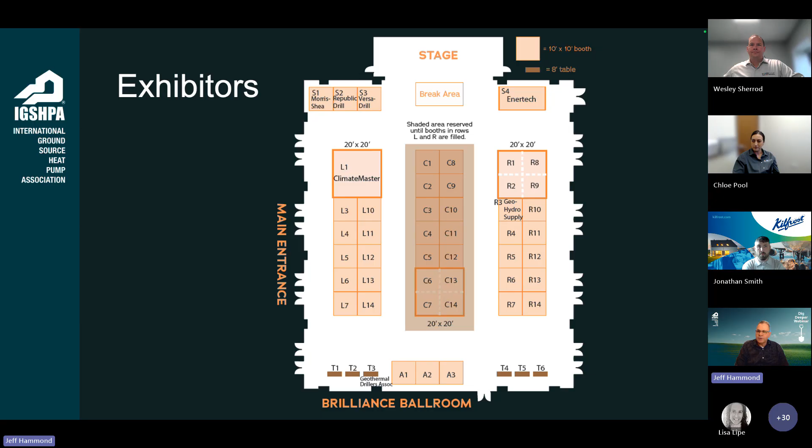If you're interested in research, IGSHPA is working with IEA in 2026 on the conference in late May in Vienna, Austria. And that's geared more towards research, university type presentations. So it's not really a conference like ours with exhibit space and so forth. It's dedicated to research.

If you haven't learned about our new training and certification programs just yet, you'll want to go to the IGSHPA website. There's a brand new page on training and a lot of connecting pages. And we also have a recording of our July 9th town hall where we go through all of the details in the new training program. It's pretty exciting. By the end of the year, we'll have over 20 new modules, and that's available to IGSHPA members at a pretty good discount.

Also, IGSHPA members have discounts on the new binational standard. This is the C448 Design and Installation Standard, CSA, ANSI, and IGSHPA. And it just came out in May. So if you don't have the standard, you're going to want to get a copy of this. It's got a lot of great information.

We still need your help on building databases so that we can tell people about all the various applications that are out there. We're always getting questions about schools, churches, hospitals, residential, you name it. And so the more information in those databases, the better it is for growing our industry.

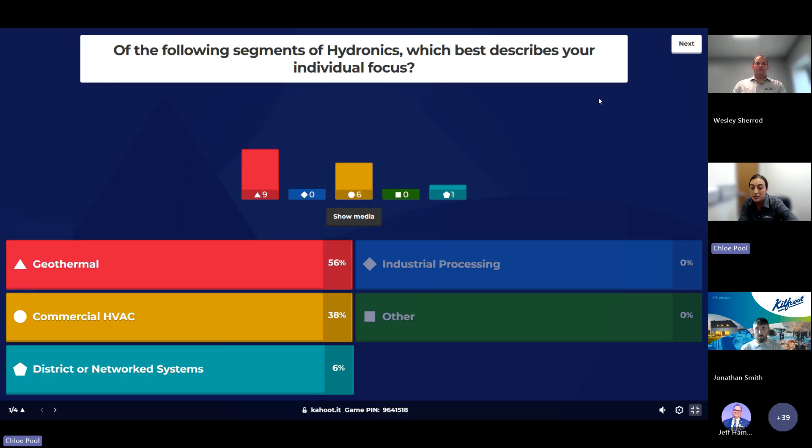Let's see what we've got. 5 more people. Here we go. All right, mostly geothermal. That is not surprising. And then we have some commercial HVAC. And then we have one from district network systems. Awesome. That's really cool to see.

Okay, here comes another poll. Which heat transfer fluid do you have the most experience with? We've got propylene glycol, ethylene glycol, ethanol, methanol, water. Some of you might not even utilize fluids in your role, so we wanted you to feel very seen. All right, everybody's chiming in. Looks like we've got about half the group. Propylene glycol, ethylene glycol, ethanol, methanol, or water are your options, or you don't use a fluid. All right, wow, a lot of propylene glycol and 2 water. We've got 1 who uses methanol, and then a little bit of ethylene glycol. Okay, good deal.

All right, next question. How long have you been in the HVACR or geothermal industry? This one's always fun to just see how much experience is in the room. A lot of times I have found it is 10 to 15 years or 20 years. That can be one of the most common answers we get, which is always exciting to see how much people really do want to stay in this industry. There we go. 6 who've been 20 years, 3 who've been here 10 to 15. We've got some 5 to 10 years and 0 to 5. Awesome. I'd love to hear from the 20-year people at some point. That's a lot of experience to bring to the room.

Okay, so here's the hard one. Speaking of climate control, how many times a day do you think the average American opens their refrigerator? This is an actual multiple choice question like the ones you'll be getting later. So people are starting to get cutthroat. I can just tell. All right, 19, 33, 28, or 25. What do you think? Okay, 6 of you got it right. The majority got it. 33. That is definitely not what I would have guessed, but I've done this 1,000 times, so now I know the answer. Okay, awesome.

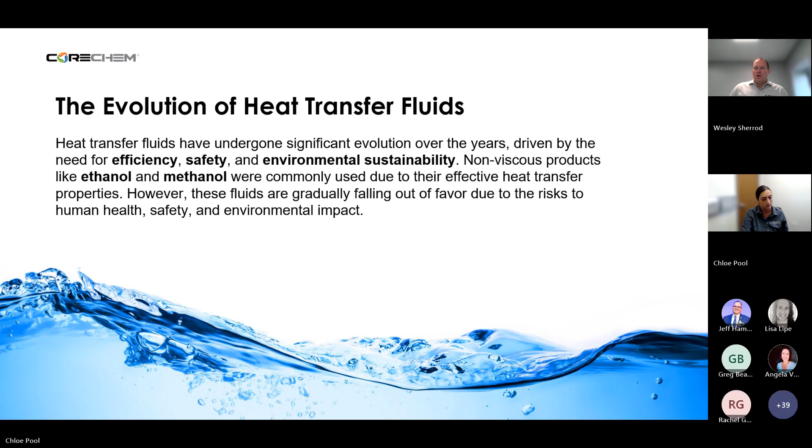Due to their effective heat transfer, because they are thinner, they act more like water does. But these fluids are gradually falling out of favor because of the risk, mostly the flammability of the alcohols, and some environmental and health effects.

So most people, when they've moved from an alcohol, turn to propylene glycol because it's a non-toxic, environmentally friendly alternative. It's not toxic like EG is, so it was okay to put in the ground and in geothermal systems. But obviously, we know about the glycol penalty, which is due to the reduced heat transfer and higher viscosity of propylene glycol in the system, specifically in systems where the freeze protection was needed at a lower temperature than what a 20 or 25% concentration would provide.

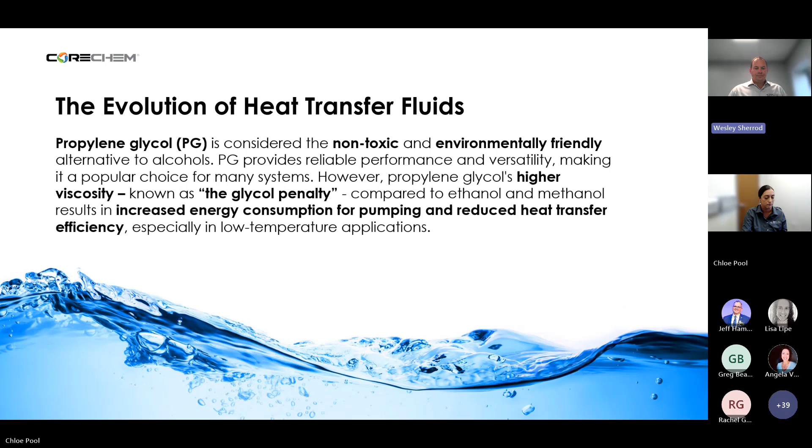So, as CORECHEM was looking at this and always trying to be on the innovative side of products, we identified that gap that existed for a low viscosity fluid that still had the non-toxic and environmentally friendly properties of PG. Can we make a product that's got those good attributes and overcome some of the less desirable attributes of propylene glycol, specifically viscosity, thermal conductivity, and specific heat?

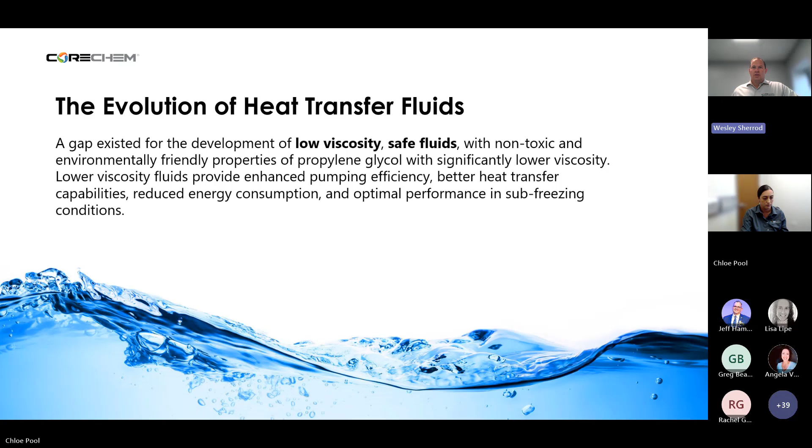So in our research, we identified the Kilfrost product, which has been in the UK and in Europe for quite a number of years, as the best bet for a low viscosity fluid. As Chloe mentioned, we reached out to Kilfrost. We had a relationship for a few years, and then last year, we consummated an agreement to be the marketing and manufacturing partner for Kilfrost in the US.

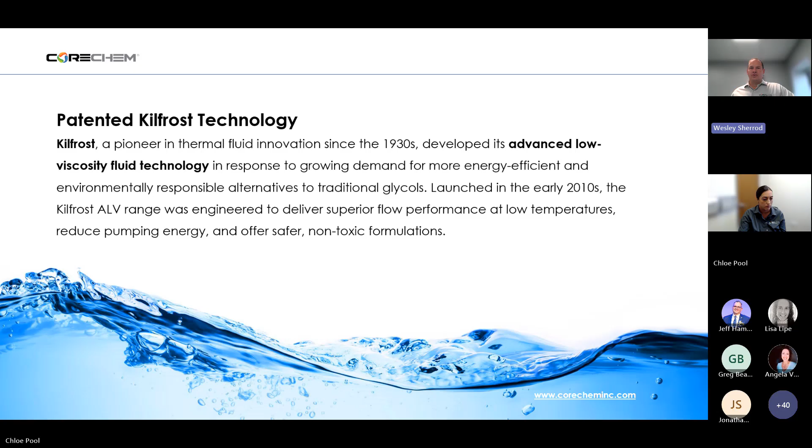So we take Kilfrost's expertise, their knowledge of the heat transfer industry, and their research and development in making this product, and bring the manufacturing and support of CORECHEM into the US market. So that's really what drove that, and as CORECHEM, we're super excited about that, because we get to take a product that's got a proven track record, great chemistry, and some very good properties, and bring that to the market in the US.

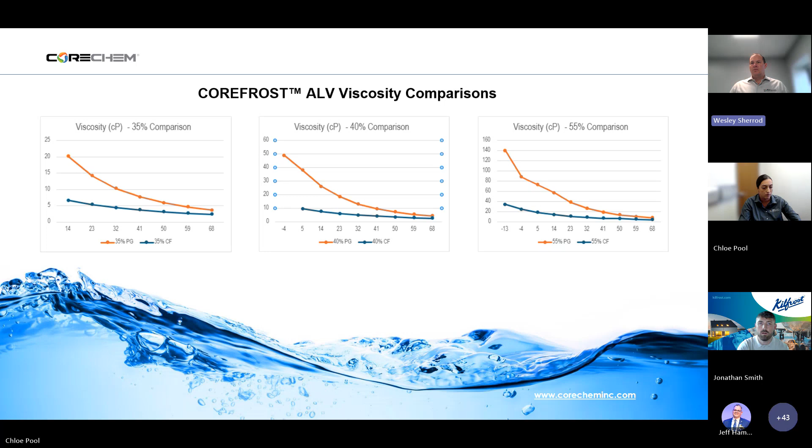And the lower you get, the more performance benefits, or the lower viscosity, you get with the COREFROST product. So again, higher concentrations and cooler operating temperatures are where we're going to see the most benefit in this product. But in a geothermal system, we've proven that benefit even at the temperatures at which they normally operate.

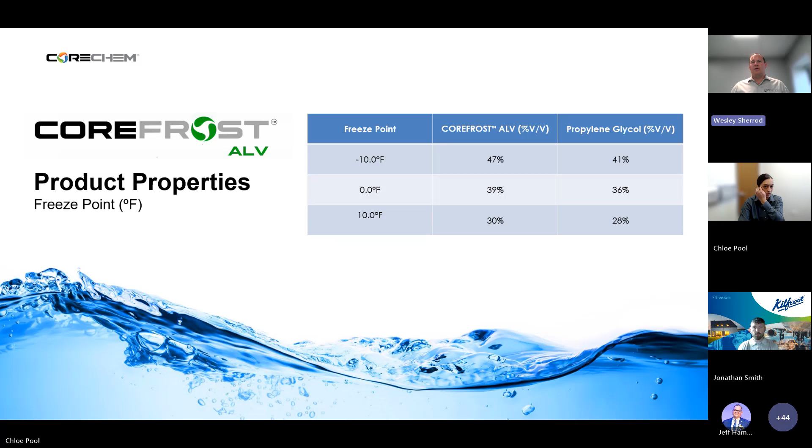So we'll go over some product properties, starting with freeze point. The COREFROST concentration is similar to propylene glycol, a little more concentrated as you move down to lower freeze points. So for any help that you need in calculating what percent you need to meet a specific freeze point you're designing your system to, you can reach out to us. We've got literature and data on the website, so that's all available information you can have.

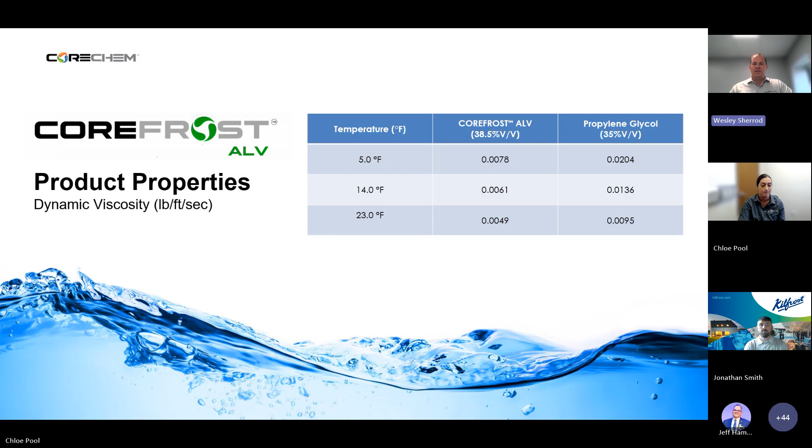So dynamic viscosity, again, we can see here, it gets better as we go lower in operating temperature. But even at 20 to 25 degrees operating temp, we're seeing approximately a 50% reduction in dynamic viscosity. So it's easier to pump, therefore consuming less power in the pump, and possibly even being able to downsize a pump in horsepower or pump size and still achieve the same flow rates.

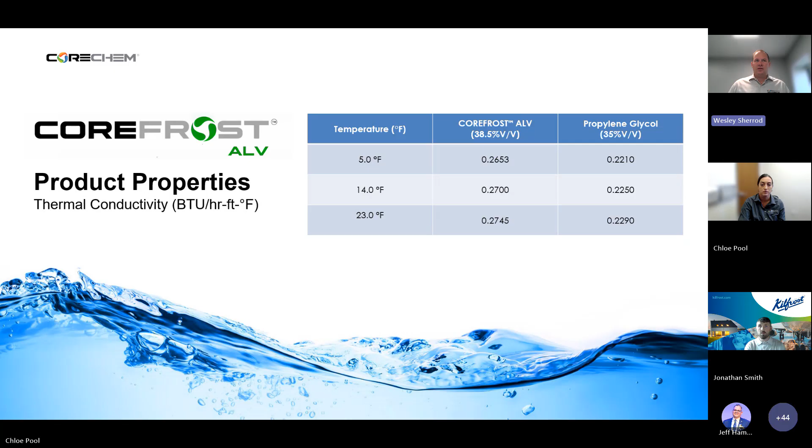Then thermal conductivity. Again, we're seeing about a 17% increase in thermal conductivity, so we're giving up or taking on heat better than propylene glycol. And this is at 35%. And like I said, the number doesn't change that much as we move down the concentration. So if we're comparing this to a 25% propylene glycol with a freeze point of around 20 degrees, we're still getting significant benefit from the COREFROST product.

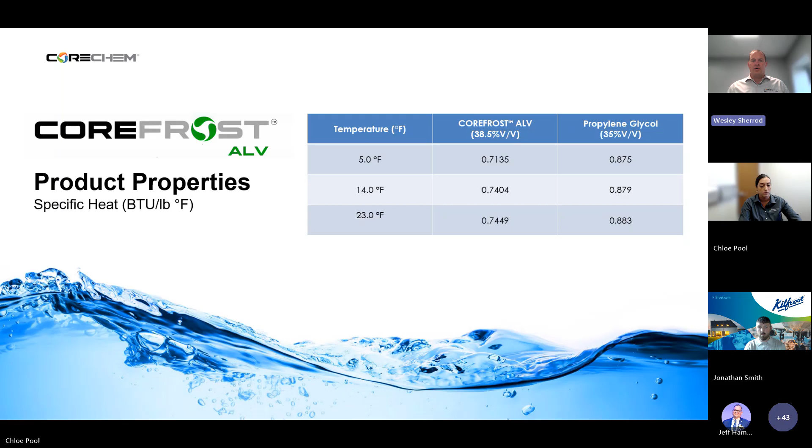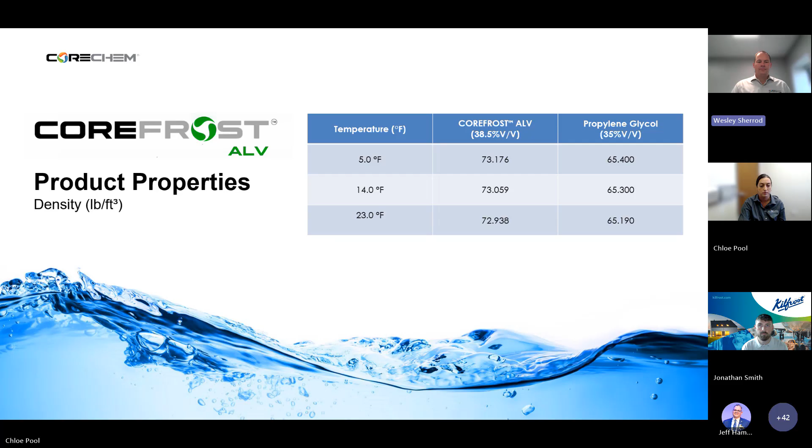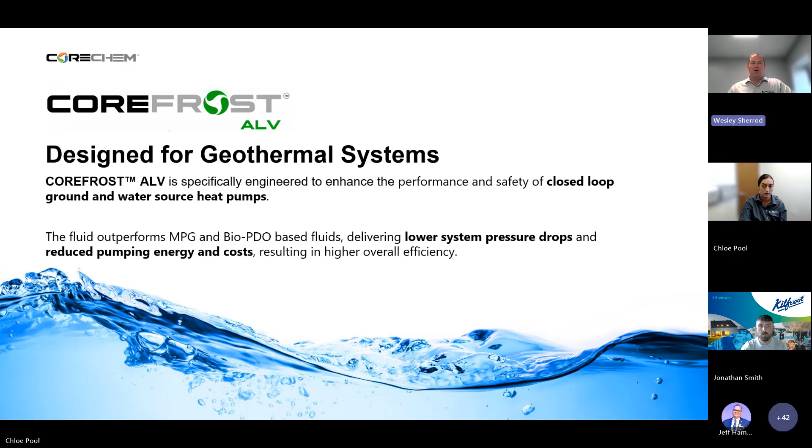So we'll talk about some of the benefits. The first one is ALV was originally actually designed for geothermal systems, so the Kilfrost product was originally designed for geothermal systems. It's the safety and environmental aspects of PG, but with performance that even outperforms ethylene glycol in most systems. You didn't want to put ethylene glycol in the ground, obviously, in a geothermal. So PG was really the only other glycol that we could use there. So this fluid outperforms that. Lower system pressures, reduced pumping energy, overall higher efficiency in a geothermal system.

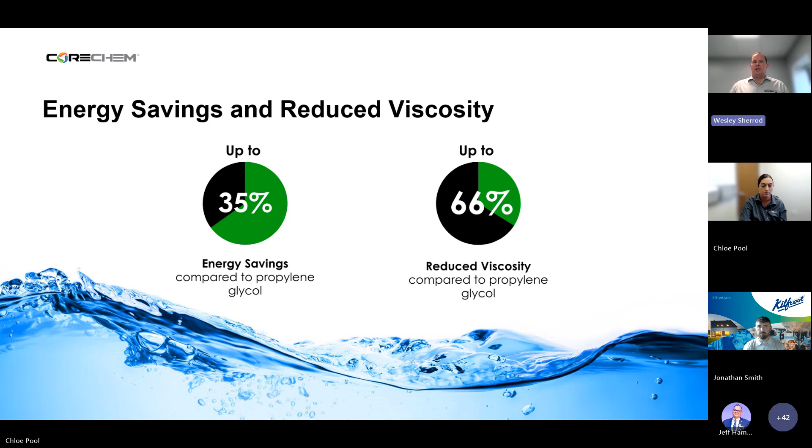It is safe for incidental food contact. There are some states and environmental regulations that require a food grade or food safe product for use in ground source heat pumps in the loop field. And ALV Plus is NSF rated as an HT1 compound. That means it's not a food ingredient, but it's safe to use in applications where food contact may be incidental. Another thing of note is that the ingredients in COREFROST are all listed as generally recognized as safe by the FDA.

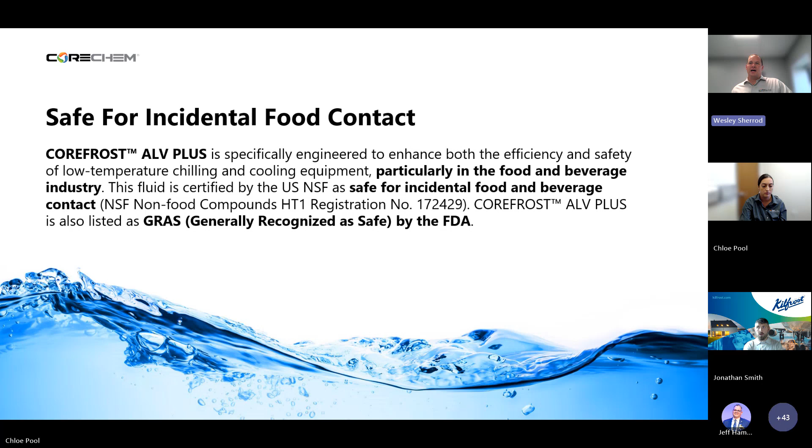So if you're not in a geothermal application, let's say you're in a food processing application or a refrigeration application where the benefit of a low viscosity fluid is going to be recognized, it's still safe to use in those applications.

Environmental impact. Propylene and ethylene glycol are biodegradable, but they have a pretty rapid biodegradation stage, and that increases your biological and chemical oxygen demand. So in a water system or an aquatic ecosystem, the stress from the reduction in oxygen in the water can cause more harm than the actual chemical in the water. So it has up to a third of the biological oxygen demand of ethylene glycol, and significantly less than that of propylene glycol. So there's less risk of aquatic ecosystem stress due to oxygen depletion. Also, the lower COD and BOD brings other benefits, less bioaccumulation and eutrophication of the water.

So can I put this in a system that already has PG? Absolutely can. Any system that's engineered for propylene glycol is just going to see the benefits of the low viscosity fluid come into play. Obviously, flushing that system out and getting rid of all the old fluid is a requirement before putting COREFROST in, or else you're downgrading the performance that you could get.

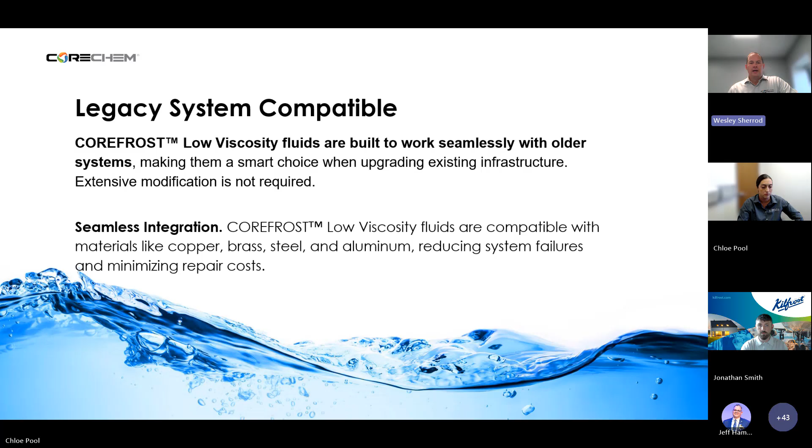It is compatible with copper, brass, steel, aluminum. Corrosion inhibitors have been added to the product to cover all the normal metals and materials of construction in most systems. And of note, it is good for aluminum, which some glycol products are not. So that's something to keep in mind when you're looking at system design. So the COREFROST products are non-toxic, environmentally friendly, so they meet any and all current safety and environmental standards.

Because of the enhanced performance and the efficiency without significant changes to the system, this allows for an upgrade, so to speak, to your existing geo or HVAC system without spending capital expenditure. It's just by replacing the fluid.

So there are some systems that we've had some experience with where the COREFROST product, because of its enhanced performance, has allowed the system to continue operating within the design parameters without being modified, either because of the building use change and the heat loads were different, or the system maybe wasn't designed quite big enough to start with. They can utilize COREFROST as the freeze protection and get that increased efficiency enough to overcome the need of having

to replace equipment. So again, we recommend if you are doing that, reach out and talk to us, because there are some specific seal materials that the COREFROST needs to operate with, and we would just like to check the compatibility in a possible system.

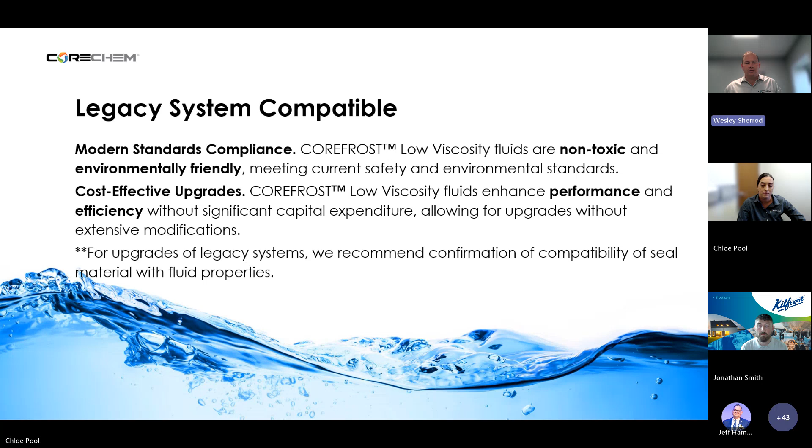So I think that's it for me. And Chloe, I guess I'll turn it back to you. Yeah. All right. Great. I didn't even share any hints this time. I'm so proud of you. Last time I had a Kahoot that only had 3 questions, and Wes ended up sharing the answer to one of them. So I appreciate that, Wes.

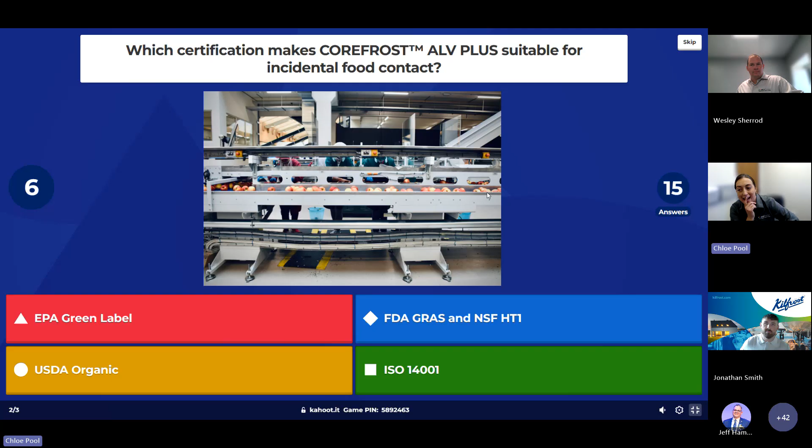All right, which certification makes COREFROST ALV Plus suitable for incidental food contact? EPA Green Label, FDA GRAS and NSF HT1, USDA Organic, ISO 14001. Which certification makes COREFROST suitable for incidental food contact? All right, it looks like almost everybody's in here. Oh, awesome job. Okay, lots of people are doing a great job. We'll see who's getting these answers fastest, because like I said, that counts too. Hey, Mike has maintained the lead, but Bob is close to gaining that lead. So let's see what happens.